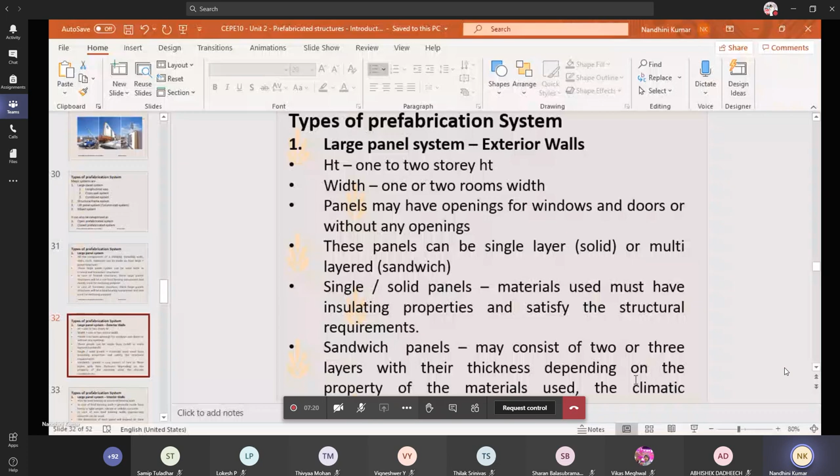Okay, we shall start with today's class. Is my screen visible? Yes, ma'am. Okay, thank you. Yesterday we saw about the different types of prefabrication. Only about the large panel prefabrication system we are going in detail. Remaining things we'll be seeing in the forthcoming slides.

Okay. Large panel systems based upon 3 types. One is exterior walls. Kindly bear with this sound. In the apartments in my neighborhood there's a small baby crying, and the sound is really annoying. Please bear with me.

There are about 3 types of large panel system. One is exterior walls, one is interior walls, and one is floor slab. We'll see about each. The exterior walls are mainly designed for 1 to 2 storied heights. Story is nothing but floor: ground floor, first floor, second floor, third floor. The width varies from 1 to 2 rooms width.

Panels may have openings for windows, doors, or any other extra openings, designed in the factory itself. These panels can be single layered or multi-layered. Single layered will be solid, completely closed in the middle. If it is sandwiched, you will have a gap, or a cooling or insulating material in between, to reduce the noise or the heat. Depending upon the locality, you can choose sandwiched layers.

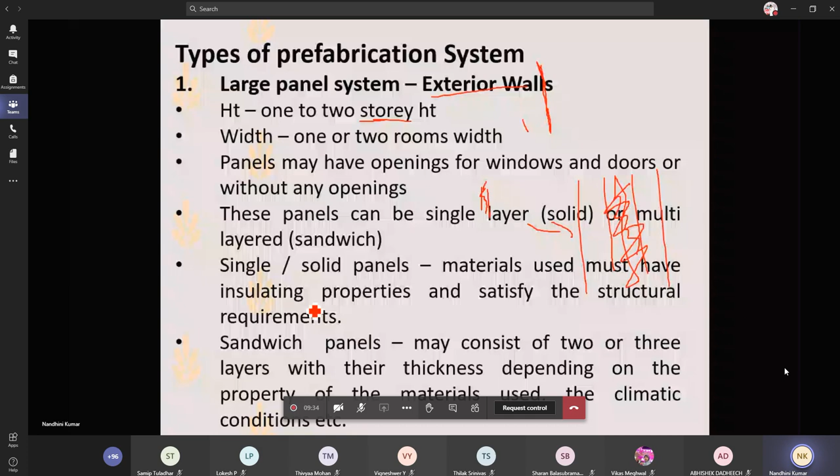In single or solid panels, materials used must have insulating properties and satisfy the structural requirements. Sandwich panels consist of 2 or 3 layers, and the thickness, the property of the materials used, and the climatic conditions are taken into consideration.

Next is the interior walls, which may be load bearing or non-load bearing. If load bearing, you can go for heavy or lightweight material, incorporate silicate into your concrete, or use cellular types of concrete. If non-load bearing, you can have it as a filler using gypsum or slag concrete for non-load bearing interior walls.

The dimension of each panel depends upon the location, room sizes and height of the corresponding story. Consider a single house with 2 different rooms, one big room and one small room. Then the size of the walls will not be equal. Both sides also will not be equal. This is room number 1.

Kindly mute yourself.

Thank you. This is going to be your room 1. This is going to be your room 2. The size of the interior walls will not be same. This outer is going to be your exterior wall. These interior walls will not be same. So depending upon the need of the plan or the need of the room sizes, you are going to cast that in the factory itself.

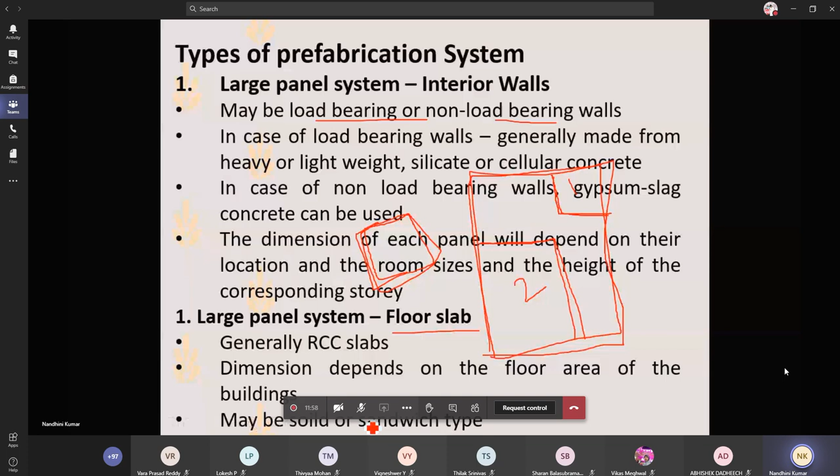There is a floor slab. Generally, you call this floor as slabs. Maybe solid or sandwich type. The large panel systems, you have 2 different types of classifications. Also, the maximum roof can go up to 12 meters in case of your industrial buildings. The weight of the large panel system should be in the range of 1.5 to 1.75 tons.

Large panel, like this is your slab. You are going to lift this entire slab at a stretch using your hoist, that is lifting equipment. You are going to lift it and place it into your building. That's the reason you go for this. When you are carrying this particular slab or your roof, that load should not exceed 1.75 tons. It should not be less than 1.5 also. It can be in this range. You can just lift it.

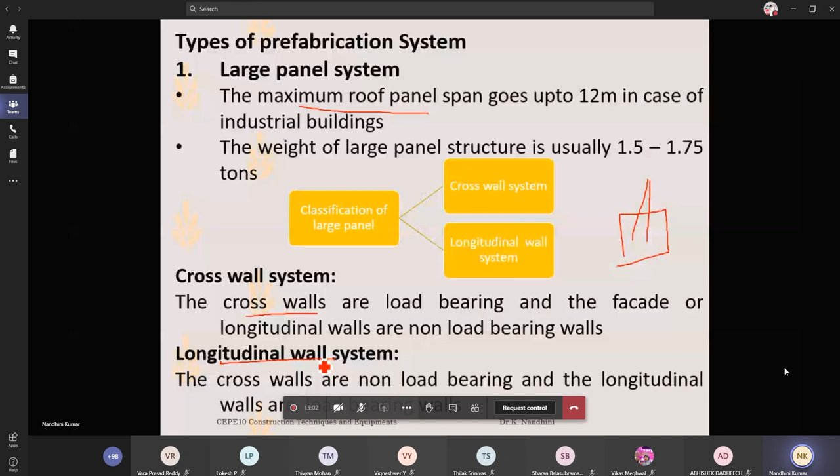The cross wall system: the cross walls are load bearing and the facade or the longitudinal walls are non-load bearing. In the case of the longitudinal wall system, vice versa, your cross walls are non-load bearing and the longitudinal walls are load bearing. You'll see this. This is what I told. This is going to be your single slab or your floor. You are going to place it over this region.

Your vertical members are done, your columns are done, your walls are done, and your walls with slits, that is openings, window openings, door openings, everything is done. Over that you are going to fix this roof slab. You are just lifting it and placing it, which means you are going to close the entire structure.

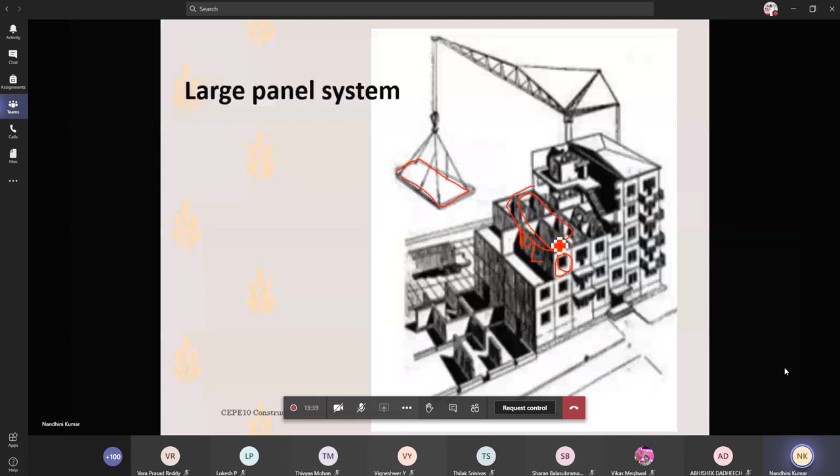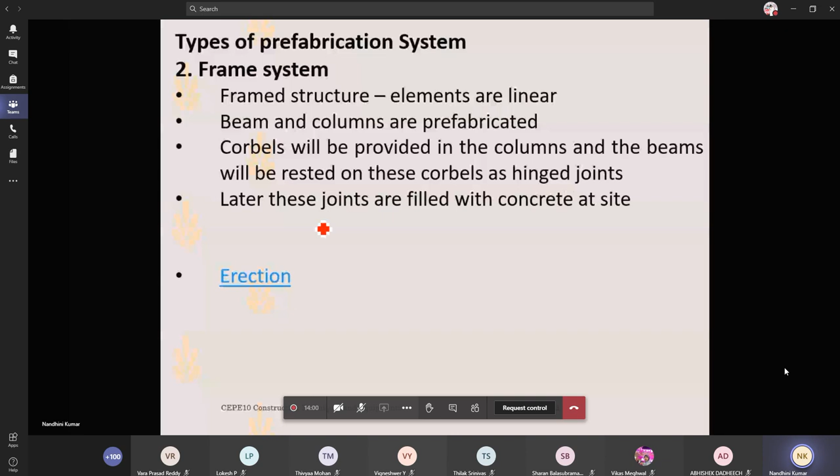Next is frame structure. In a frame structure, elements are linear, beams and columns are prefabricated, and corbels, that is additional supports, will be provided in the columns. The beams will be rested on the corbels as hinged supports, hinged joints. Later, these joints are filled with concrete at the site. We'll be seeing all this in detail.

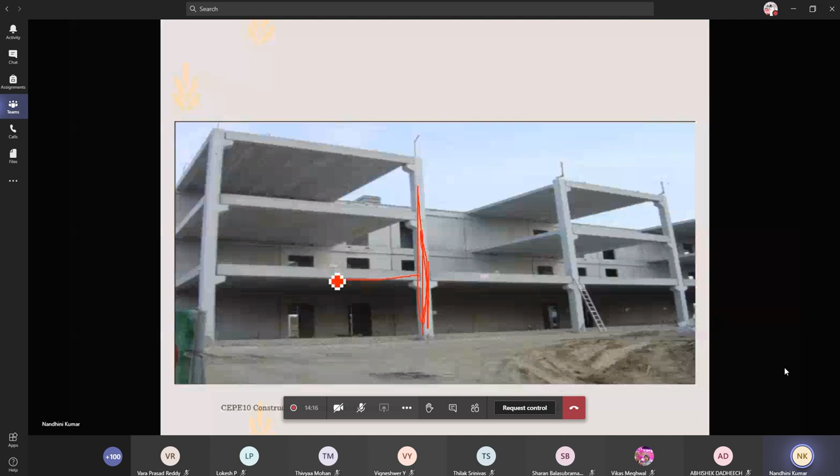This is the framed structure panel. Here, you may have this complete as a prefabricated structure, and you can simply connect it. Can you see? This column is a single unit. That is the frame system, which means your entire outer structure is going to be your frame, your skeletal structure. You fix this vertical thing, then you go for horizontal placing of your slabs or your beams or your roofs.

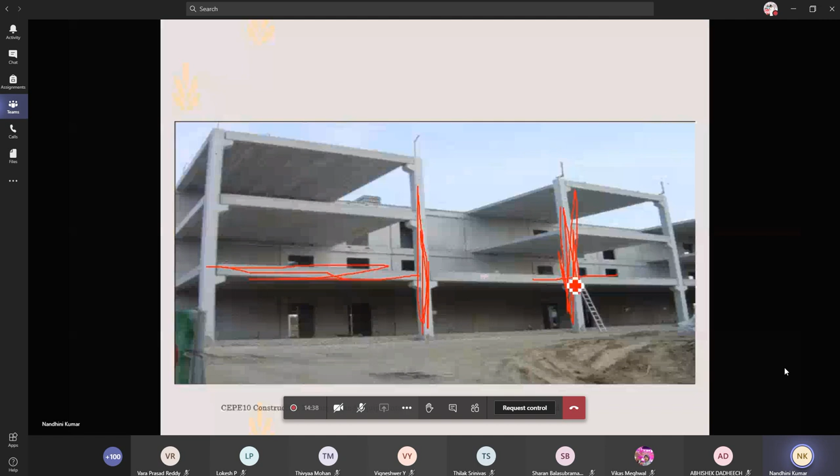This is the frame system. In the frame system, you have the RC column and the RC footings. This is the column. Can you see? This is the footings. Sorry, it's not working actually. Okay. And this is going to be your slabs. This is going to be your beams. This region is the walls. All these you will be doing in the framed system.

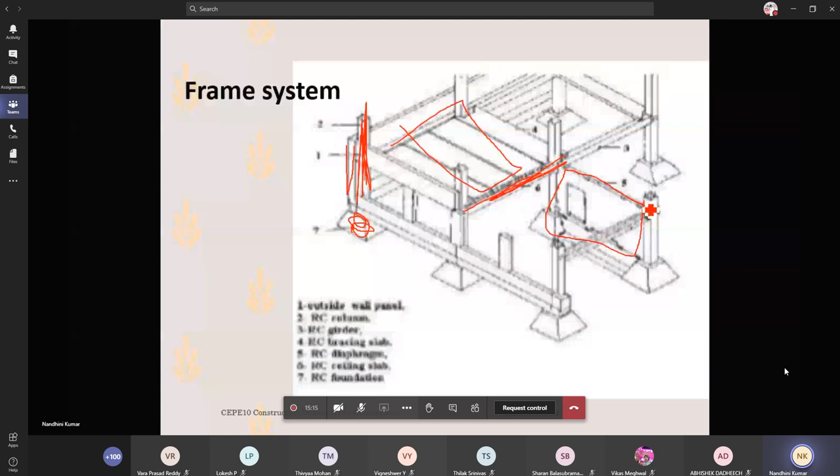Next is lift slab system. What is meant by lift slab system? When you're going for a uniform structure from the ground floor till the top floor, it is going to be a typical structure. Typical means if the first floor has only one room, one kitchen, the same plan is going to replicate in your second floor, typical throughout your structure. That time you can have this number of slabs. The concept is you place all the slabs in the ground floor, one over the other.

After placing it, then you can lift the top. You'll have some layers: 1, 2, 3, 4. This first one you can lift. Over that you can lift the second one to the corresponding position below it. You can lift the third one to this. Likewise, you can lift one beyond the next.

Partially precast in plant or pillars. Partially precast on slabs. One or more storied. For multiple storied, you can go by this way. Up to 30 storied height construction, this lift slab technique is highly suitable. Specially designed joints and temporary joints. Slabs are cast on the ground.

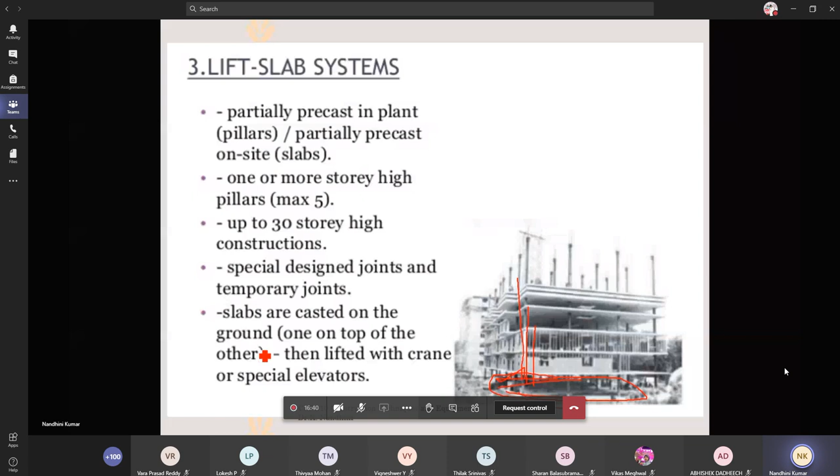We'll see this. You have 8 pictures here. First one is pillars and the first packages. For example, 5 pieces of slabs are prepared at the ground level. You have 5 pieces of slabs over here. Now you are lifting the topmost slab alone. You take it up, and meanwhile you take the second one here. You take the third one. Simultaneously, you are lifting the top as well as the following corresponding slabs. You are going to lift it.

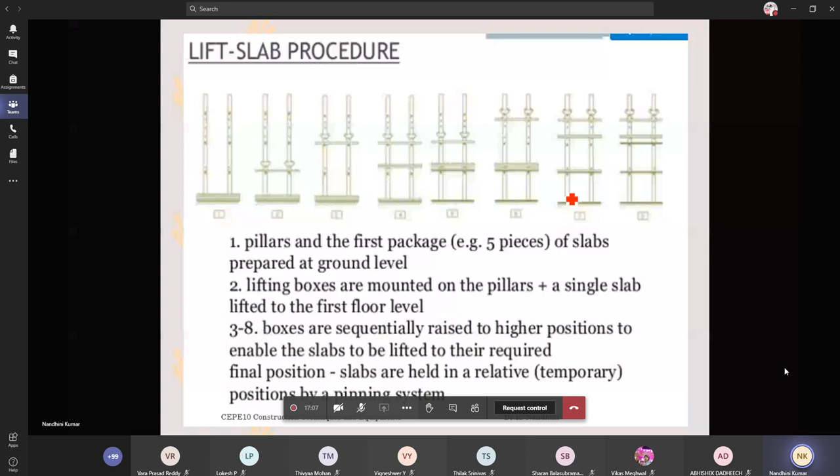Wall panel connected to in situ concrete. Now you see this is your footing. This is your floor level. You have already cast this. Now you are going to place this wall here. That time you need some bond between this footing and your wall. For that reason there will be some reinforcements provided in between. As you already saw in that hollow block construction, you will be having some reinforcing bar.

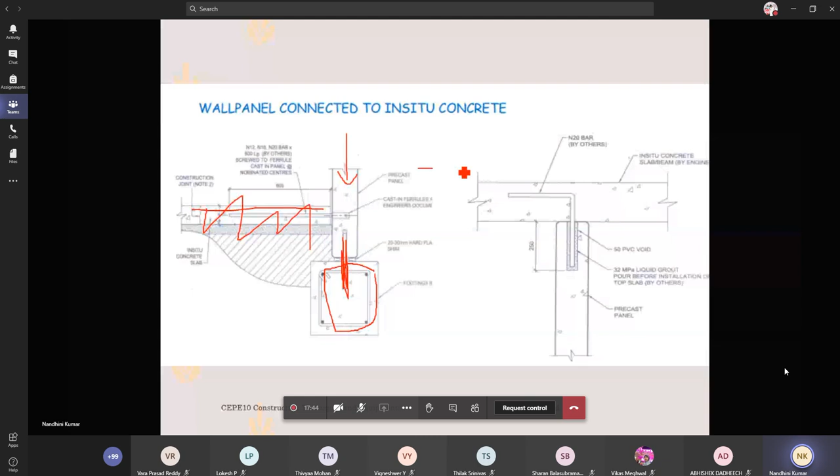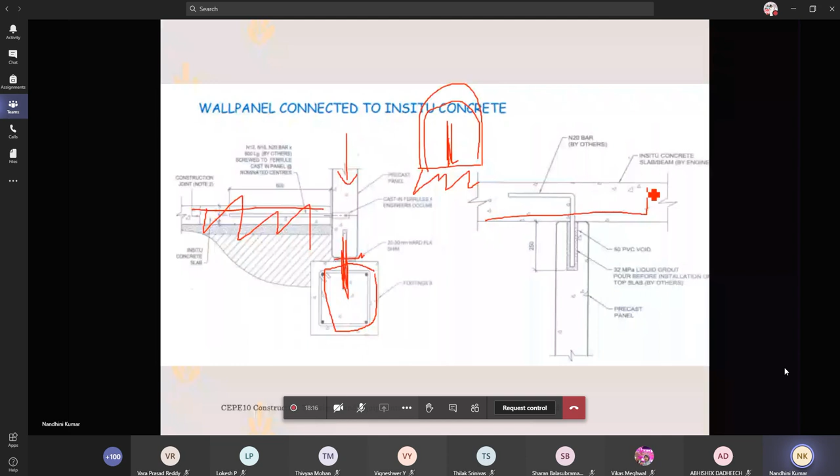Over that you will place your wall. Place your blocks. Typically, you will have a footing here. Over that you have the reinforcements here. Over that you place your wall, and you just make it as a capsule. You just tighten it, and there will be some provision for you to tighten it using nuts and bolts. And in this case, you can see this is a beam, and this is a column.

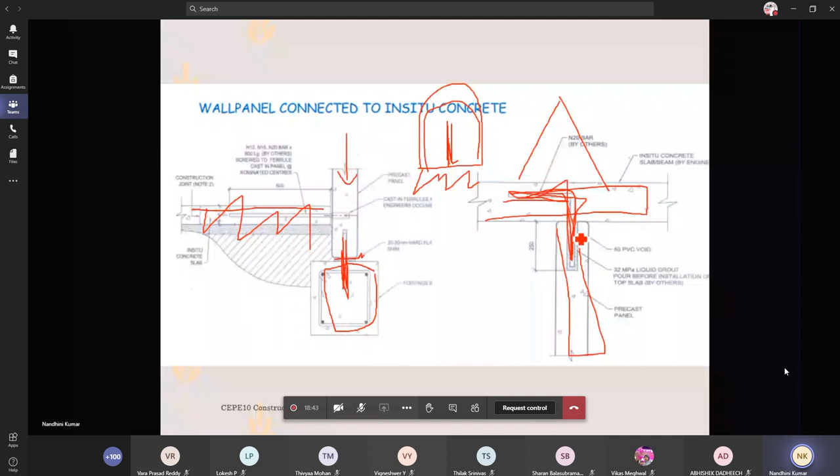Now, how are you going to fix it? There are other types of fixing through reinforcement cages or anchoring type. One will be inserted into the other, like you're going to fix one over the other. While placing this slab or beam itself, you should make sure that this hook will be provided inside the beam. You should make sure that this is coming and fitting into the column. Those things should be ensured at the work site.

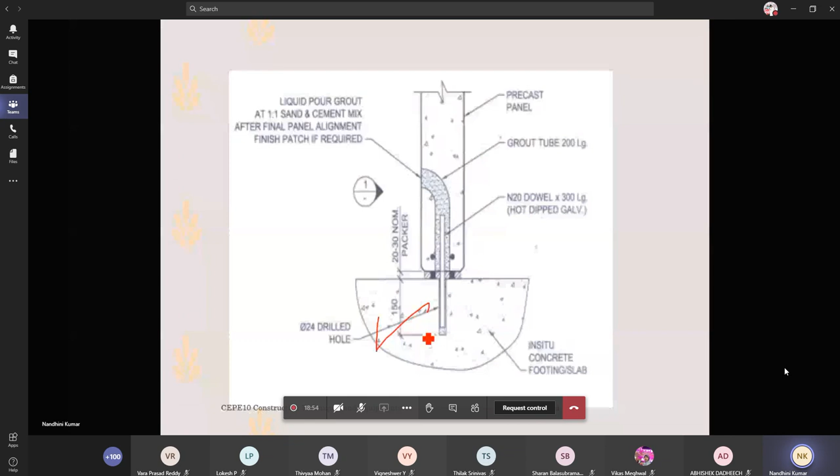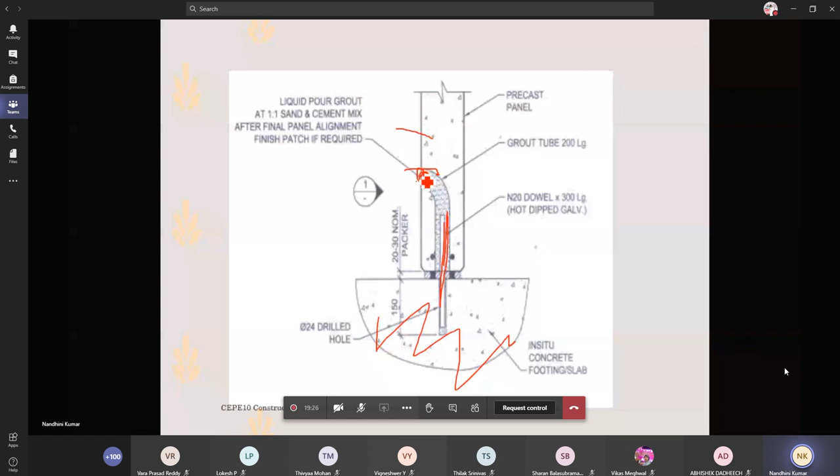And this is a footing slab. It is already done, cast in situ. You are going to bring this precast column and place it here. How are you going to place it? You have a hole-like provision here over which you already have this reinforcement dowel projecting. Over that you are going to place this column. You have some hole here through which you can grout it, which means you can pour your cement slurry to provide a bond between this reinforcing bar, this foundation, and this column. You're going to bond everything together. That is the reason you pour cement grout into this.

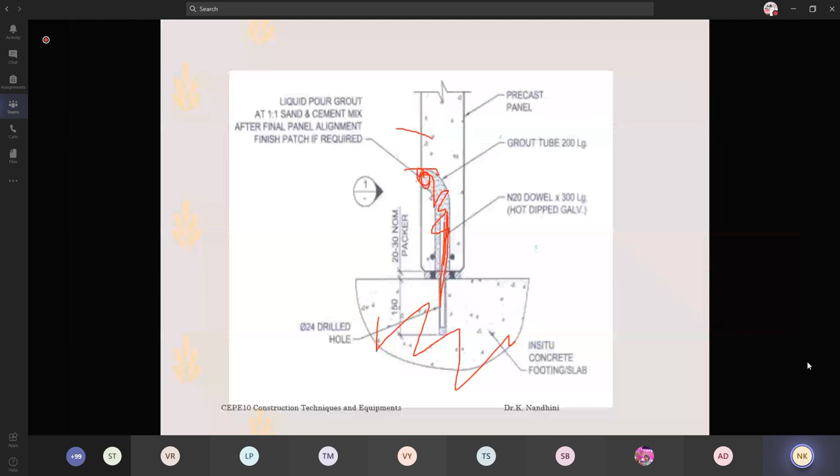And now we'll see about column to column. We already saw footing to wall, slab to beam, and foundation to column. Now we'll be seeing column to column connection. This is already done. This is already in the site. Now we are going to place another thing here. Here is a square type of shims called steel plates. You are going to place it over that. Again, you will place this column.

This is the inner view. This will not be shown normally. This is the inner view, how the reinforcement will be looking. Actually, this is the outermost view that you will be seeing. It will be in this shape.

Can you see this? Are you all along with me? Yes, ma'am. Okay. Thank you.

It will be in this shape, provided that there are hooks over here. You can tighten it using your nuts and bolts. You can firmly fix this top column with the bottom column using the nuts and bolts provided here. And you have this spacing exposed. Since these nuts and bolts are made of steel, they should not get corroded. So you tightly pack this with cement slurry, with grout. You are done with this. Your entire structure is going to be uniform when you see it from outside.

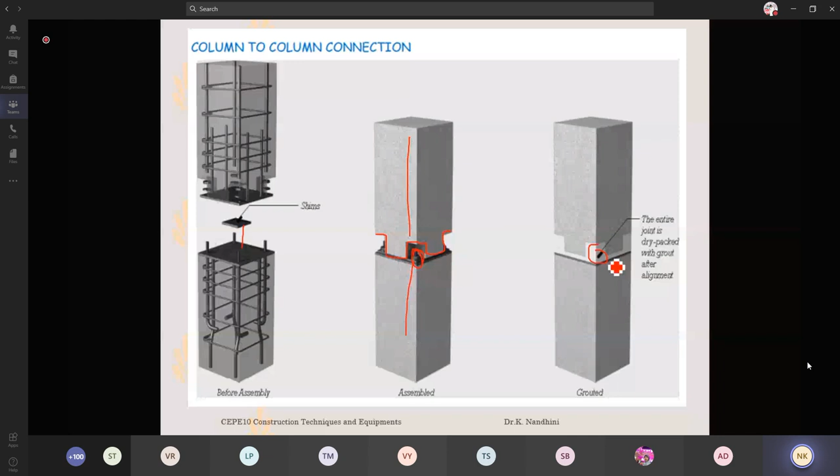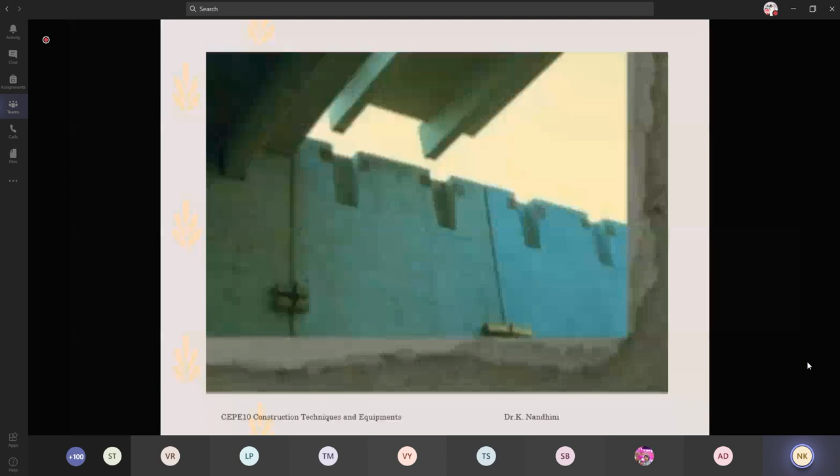And this is wall to slab connection. See, this is your wall. This is your slab. This is your beam. These both are connected. Now you are going to bring this entire unit here and fix it here in this particular area.

Wall to slab connection. This type of slab you can bring it and fix it here. You can see you have the indentation to the inner side. You have some indentation where you can place this slab over here. Precast concrete structure consisting of solid wall panels and hollow core slabs.

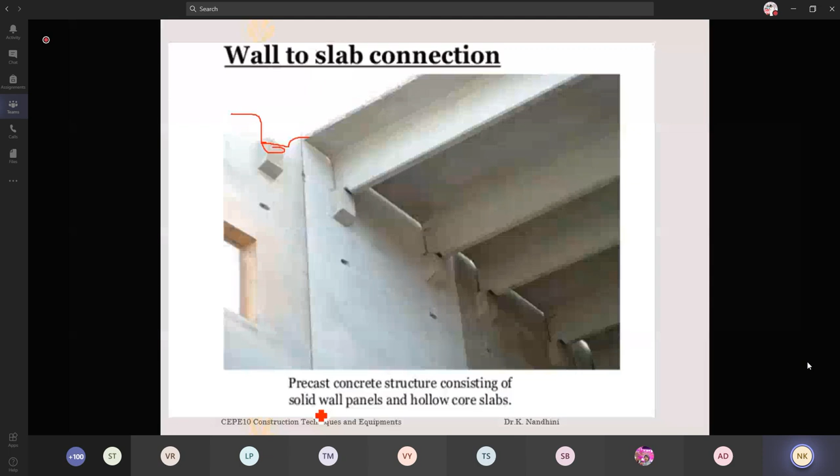And the main equipments we use here are the mobile cranes and the tower cranes. Mobile cranes are nothing but you have a trailer type or tractor type over which you have some folded type of cranes. You can open that. From the machinery, you can lift it and place it at the site.

Whereas when you go for this tower crane, this tower crane will be mounted in your work site. With the help of the tower crane, you will just lift the placed materials, that is the precast structures. You will lift it and you will place it over the structure. This is the use of tower crane and this is the use of mobile crane.

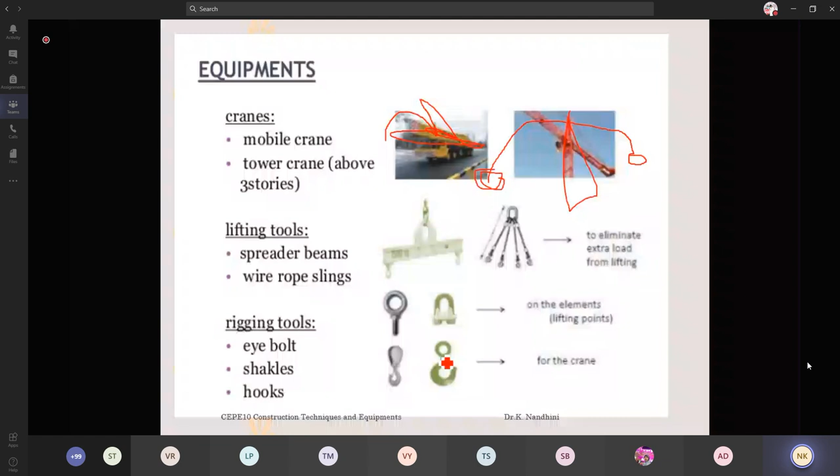Lifting tools, spreader beams. These are the spreader beams, wire ropes. Upon every prefabricated structure, we provide some hooks, like this type of hooks. It will be provided to your structure. Only then you can insert a hook into this and lift it using the crane.

This type of hooks you might have seen in the cranes. Yes? Have you seen anyone? Yes, ma'am. Yes, ma'am.

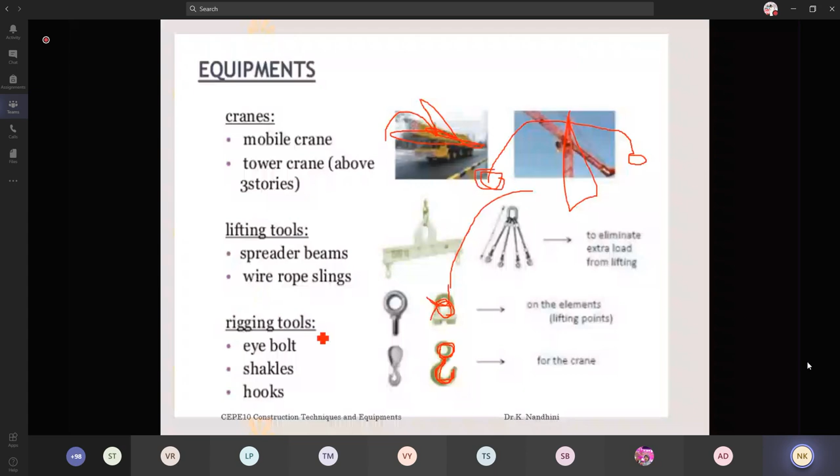This you'll be seeing in the cranes. This hook you are going to insert into this type of lifting points. These lifting points you'll be having in your structure, either your wall or your column. You have to insert this and you are going to lift it. Lifting tools are spreader beams and the wire rope, and rigging tools are your eye bolt, shackles, hooks. These are your rigging tools.

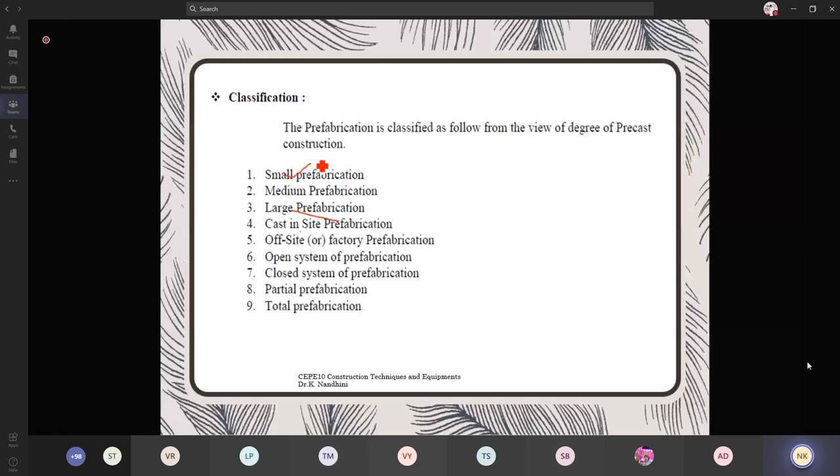Okay, our large panel system is over. Now we'll be seeing the remaining type of classification. We already saw this classification, but we didn't go in detail. Now we'll be discussing in detail. Large is done. Now we are going to see about the small, medium. Small is for a very small member, where you don't need any large equipments. Large tower cranes are not needed. Only the mobile cranes are sufficient to place the small units into your work site.

Medium prefabrication: suppose the roofing systems and the horizontal members are provided with the precast elements. Those constructions are known as medium fabricated. The degree of prefabricated elements is moderate. When you are going for a medium type of construction, some G+2 or G+3, that is sufficient. For that, we are going for medium type of prefabrication.

When your structure is going to be large, either vertically or horizontally, we are pushed to go for large type of prefabrication. In large prefabrication, most of the members like wall panels, roofs, flooring systems, beams, columns, everything are going to be prefabricated. Here the degree of prefabricated elements is high.

Next is cast in situ or off-site factory prefabrication. Here, one of the major factors which affects the prefabrication system is transport. As we saw in yesterday's class, transport is a major problem, which is quite costly and time consuming. You have to transport from the available factory to your work site. That is going to be a difficult process. The width of the walls, mode of transport, vehicles are the other factors to be considered in prefabrication.

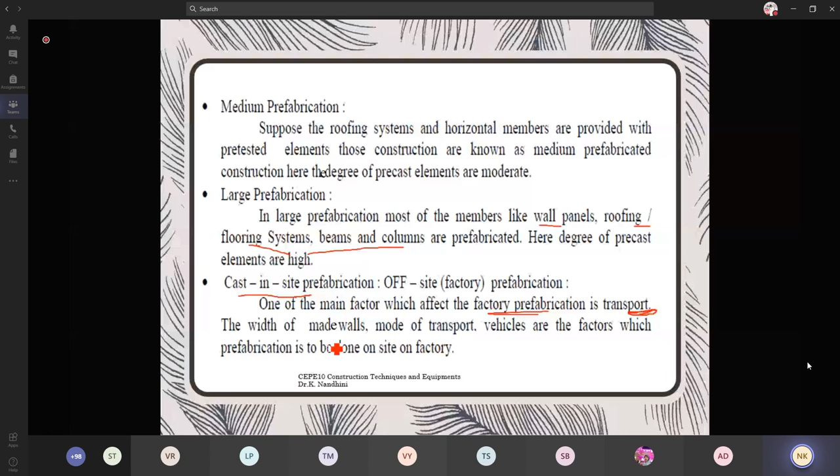What is open system and closed system of prefabrication? In total prefabrication systems, we already saw about the frames. Our outer frames are cast in a single unit and erected at the site. Your entire frame structure alone is cast and it is fixed. Over that, we fix our walls, beams, and the following roofs. The above levels' walls you'll be fixing. This is going to be open system, which means your framed work is open. Above that, you're going to fix your panels.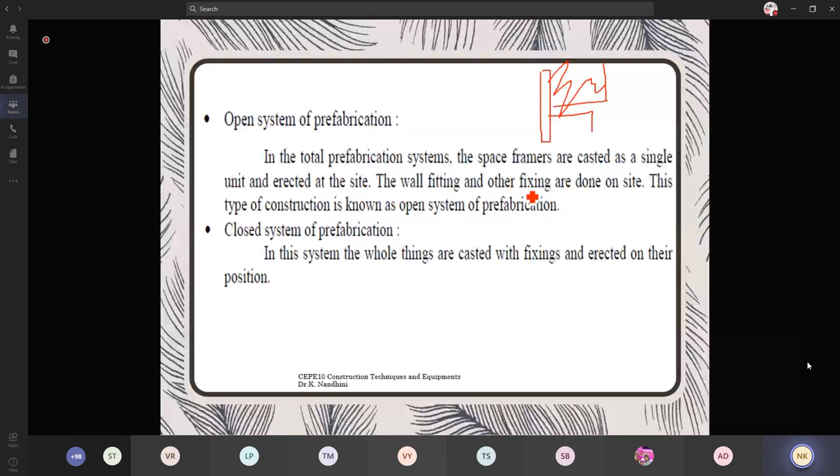Closed system of prefabrication. In this system, the whole things are cast with fixings. Your entire structure falls under the prefabrication system: prefabricated columns, prefabricated walls, slabs, roofs, everything. Partial prefabrication system.

If I'm running out of time, you kindly just remind me. Anyone can unmute and remind me. Whenever I'm exceeding the time, kindly intimate me.

But don't tell if you're boring. Just don't tell, ma'am, it's time up, and you shall not wind up like that.

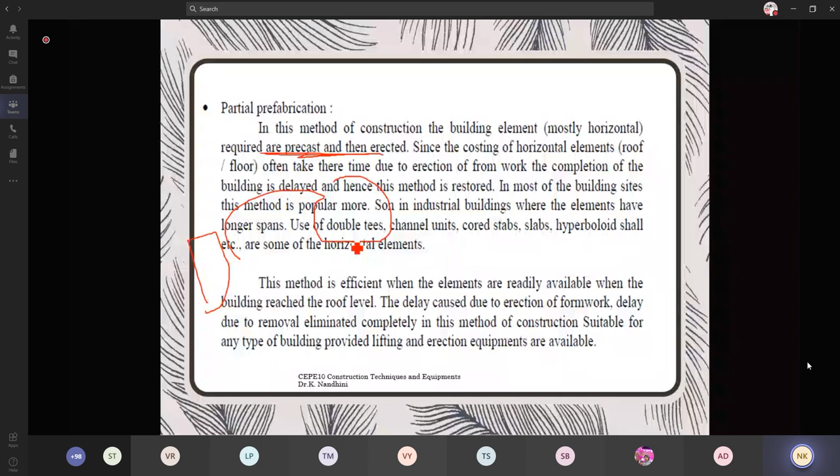Okay. Partial prefabrication: in this method of construction, the building elements, mostly horizontal, go for precast erection. Since the horizontal elements fall under roofs or floors, it takes time due to the erection of formwork. Once it is done, from there you are going to erect it and place it. It may be time consuming. In most building sites this method is popular, and in industrial buildings where the elements have longer spans. For the longer spans, the roof alone they'll be doing in industrial type of building construction.

What they do is our columns, our floors, everything will be done initially. Imagine this is your structure without a roof. Okay, this is your roof, and this roof alone they'll go for prefabricated structure. The remaining columns and walls, everything, they'll go for the normal conventional type. This roof may consume time because you definitely need to prepare your shuttering, formwork. You have to fix your roof, and then you have to pour your concrete. You have to give a minimum of 7 to 21 days to gain the concrete strength.

If they're considering that time as time consuming, then they'll go for partial prefabrication systems. Only the ready-made roof they'll purchase and fix over the structure. This method is efficient when the elements are readily available when the building reaches the roof level. The delay caused due to the erection of formwork and the removal of formwork is eliminated completely, which is highly time consuming. Suitable for any type of building, provided lifting and erection equipment is available.

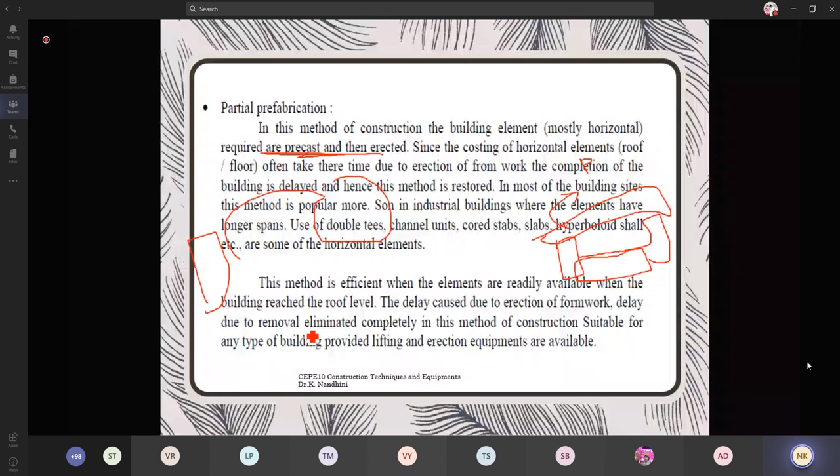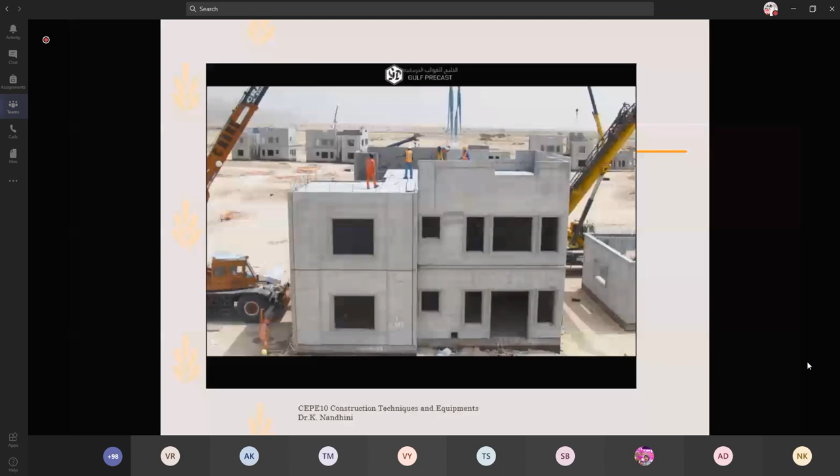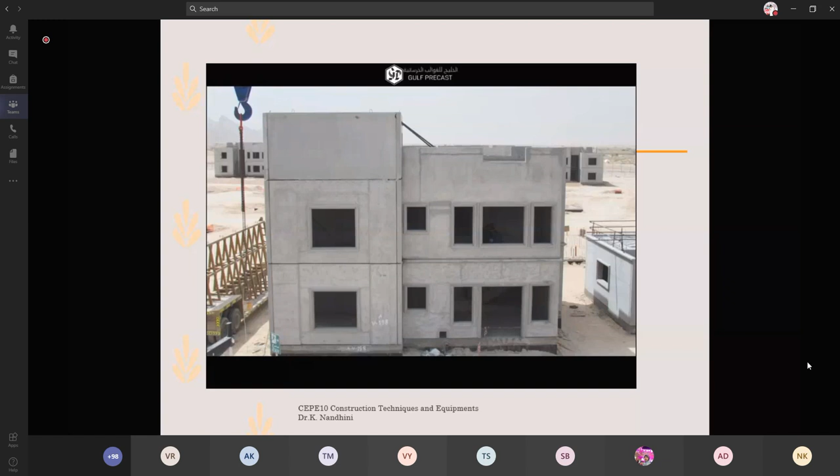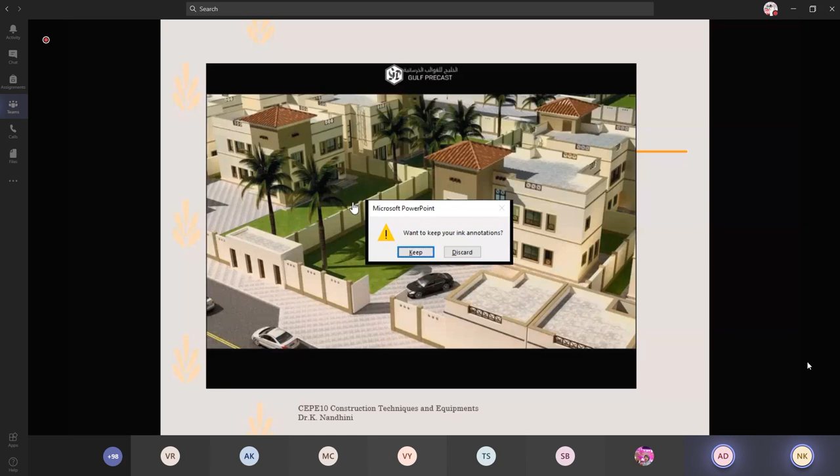Yes, you saw this video? Yes, ma'am. Yes. Yes, ma'am.

Okay. This is how they do the precast type of construction in the work site. Everything is ready-made. The main source for this is the feasibility of the lift location, your crane location. Once you fix your crane in the proper axis, you should make sure that it is highly accessible to the storage unit and your work site. You just have to lift it and place it accordingly. As you saw, only very few laborers were working over there.

In case of conventional concrete, a huge number of laborers are required. Meanwhile, there'll be so much noise produced when you're working on-site. You'll have either your RMC machine or your concrete mixer machine going on, and your labor sounds will be there. But here very few laborers are required, provided only skilled laborers are required in this case. Okay, we saw the types.

How many minutes more? 10 minutes. Okay. We'll see this fabrication process in tomorrow's class. If I start now, I shall pass through only 10 to 15 slides, and there will not be continuity for this fabrication process. I need to cover it in a single complete class. So we shall continue in tomorrow's class.